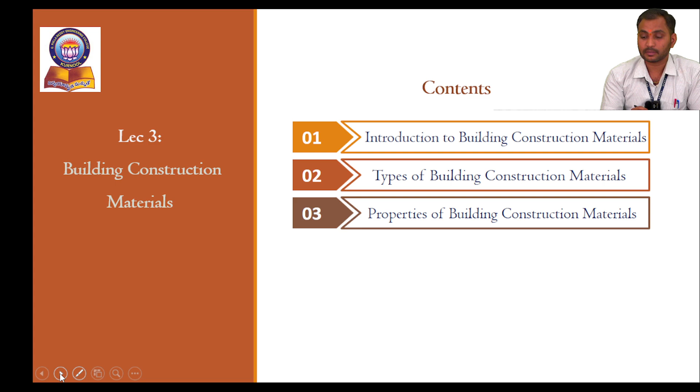Building Construction Materials. We'll discuss the topics in this session under lecture 3, Building Construction Materials. The contents are: first, introduction to building construction materials; second, types of building construction materials; third, properties of building construction materials.

Now let me explain the introduction of a building material. First, what is meant by a building material? In previous lecture 2, we discussed building planning and building construction. For example, if we want to construct any building, whether residential, commercial, institutional, theaters or industrial, any type of building, we already know the requirements of planning conditions. Now we need to know how it has to be built, what materials we have to use. So in this session we will discuss the material.

Building construction material, in civil engineering, any type of material, will be very useful for different purposes. There are some common materials: stone, we can construct stone masonry; bricks, we can construct walls, brick masonry; concrete, for structural framed structures - slabs, beams, columns, footings, all RCC type structures we can construct with concrete.

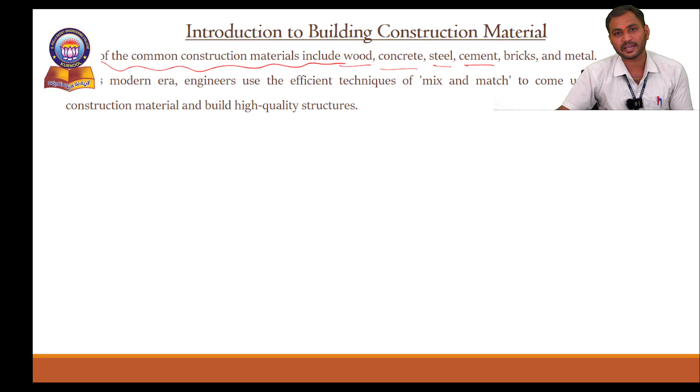What is the purpose of cement? If we are giving bond between two papers, we use an adhesive material, either gum, fevicol, or fevistick - for wood we can use fevicol. Like that, for our building construction, for bonding strength in our structure, cement is used.

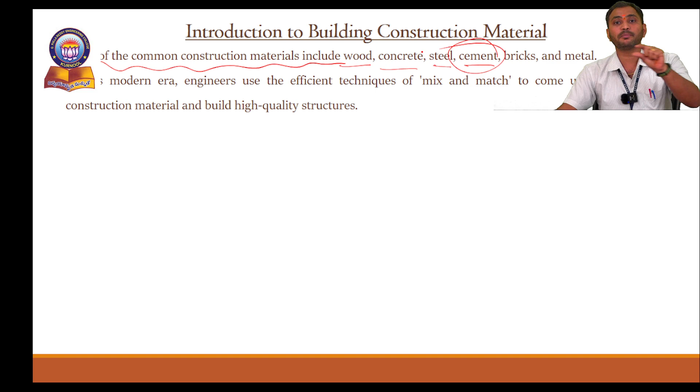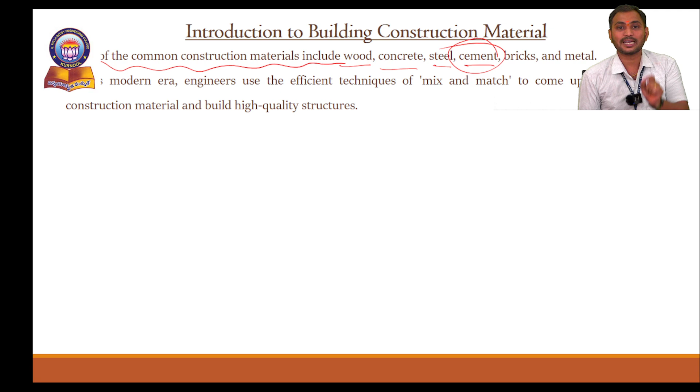So cement mortar is placed between two bricks. These two bricks cannot be attached without it, so between these two bricks we provide cement mortar. Not only does it give bond between the two bricks, but it is also used to prepare concrete material.

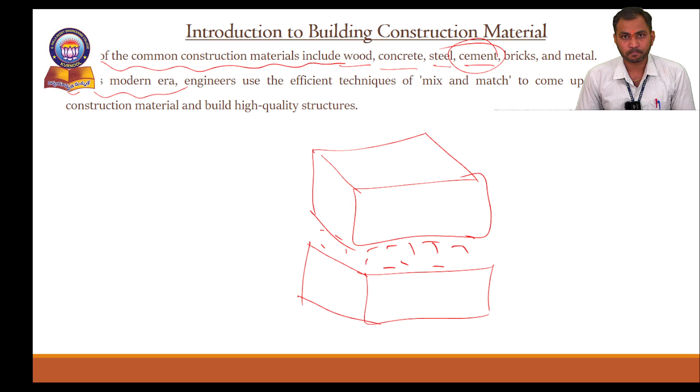In this modern era, most civil engineers are thinking of different types of building materials. In the olden days, most structures were built using stone masonry - some irrigation structures and forts are examples. There are some basic materials like that. But in this modern era, and in upcoming future, many researchers and scientists among our civil engineers are inventing different types of materials.

Cement is prepared in industries or factories. We will see how many types of cement there are in our upcoming slides.

Next, bricks - red color bricks, cement bricks, lightweight bricks. There are some different precasted bricks also. So there are efficient techniques to mix and match to come up with the best construction material. Lightweight materials also we are using for the construction of a structure.

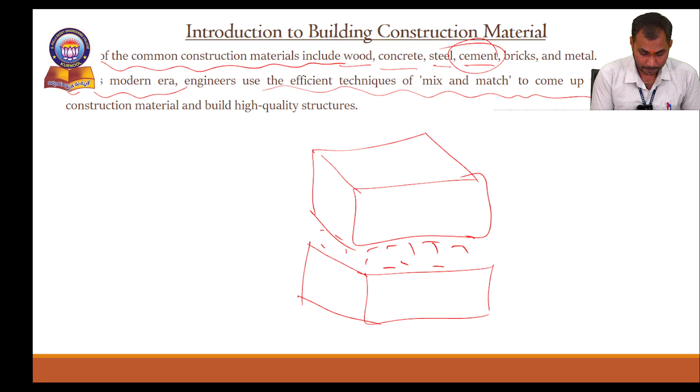Let me tell you a small important point to keep in mind. Whenever we are going to construct any type of structure, we will select a material. We should not directly use it for the structure purpose - we have to check the quality.

A small example - you people are studying in the BTech field, engineering field. Up to 4 years you will study in your college. After the 4 years, some people will go for higher studies, some will choose government sector jobs, or some will go for private jobs.

When going to private jobs, software jobs, some companies come to the college premises for placements. Do they directly hire them? No, they will interview the students. In that interview, what are they trying to find? Nothing but the quality of that person - whether the person can do our company's work or not, whether he is fit for our company or not. That's how they do the interview.

Same way, for any type of material we are going to use for construction purposes, we have to do the quality test. Without good quality, we should not introduce it for our building construction purpose.

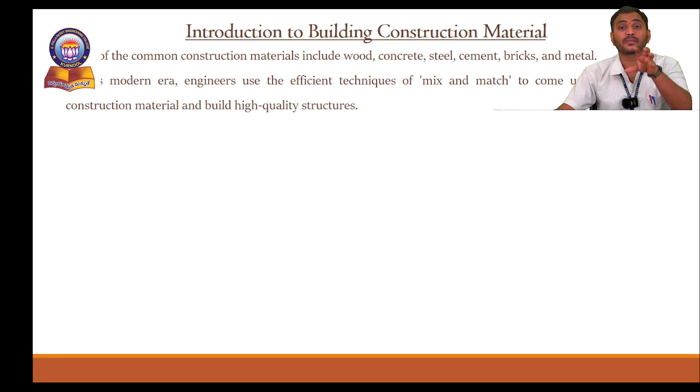There are some types of building materials. One is bricks, next is cement, third is concrete, fourth is sand, fifth is steel or reinforcements, which we use to construct slabs, beams, columns, footings, staircases, or any type of structural elements - we use these steels.

Next, glass - we provide it at window frames. Next, plastics - what is the need of plastics or fibers? For plumbing purposes we can't use steel, so for that purpose we use plastics. Next, woodens - to have doors or to frame windows.

Next, tiles - what is the purpose of tiles? For flooring purposes, or for walls in bathrooms or any urinal places, tiles.

When we are going to select any type of building material, we have to check whether it is good quality or not. Next, we have to check whether it is cost effective or not - low economy or high economy. Third, under which class it is coming - classification, whether it is grade 1, grade 2, or grade 3. If it is grade 1, it means it is very good quality in size, dimensions, everything is right.

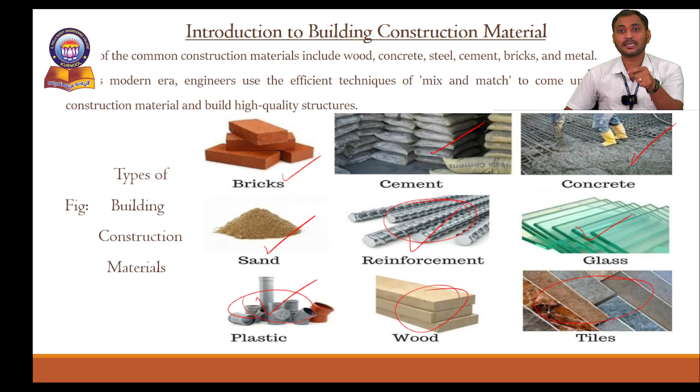In grade 2, somewhat medium quality, okay, for small works we can construct. If grade 3 very poor quality, we can tell no. So all these objectives we have to see: one is quality test, next cost and economy conditions, and third is the grades we have to check for every type of construction material. Why? Because by using these construction materials only, we are constructing the building structure, so our building structure should be strong, safe, and durable by taking the support of these materials.

Now, what are the properties of the building construction material? Nothing but how we are getting that property. For example, what is the strength about you? If any load is applied on you, we will get your strength. For example, we are applying 5 kgs, whether you will bear that 5 kgs or not. Yes, you will bear it. Next, extra 5 kgs will be added, how much, entire 10 kgs. So will you bear that 10 kgs or not? Yes, you are bearing that, 10 kgs of load you are bearing.

Again, I am adding extra 5, so total how much, 15 kgs of load. Are you bearing or not? Some small deformation, okay, somewhat little bit you are bearing that load. Again extra 5, now entirely how much, 20. By applying 20 kgs of load, suddenly what will be happening? Suddenly you will get deformation. Nothing but what is your strength, how much load is applying on you, 15 kgs, how much strength? Nothing but stress means load by area we will calculate now. So like that you are bearing some 15 kgs, up to 15 kgs of weight, like that we can tell.

So like that, how the properties, there are 3 general basic properties: one is physical property, second one is the chemical property, and third one is the mechanical property.

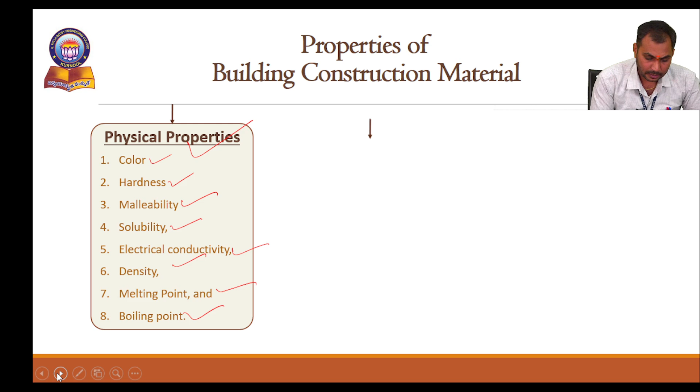When coming to the second one, chemical property. Chemical property means nothing but is there any chemicals present. For example, wood: if you are going to apply any acid or phenol or any chemical agents, how will the wood react? If it is going to be damaged, means the entire structure will be damaged, no?

For example, concrete, we are preparing the concrete by using natural resources. So in those natural resources, if any chemical agents were added, is there any problem or not, we have to check. Nothing but toxicity, reactivity, coordination numbers, oxidation states, flammability, heat of combustion, or else in water also we have to check the chemical properties. Nothing but alkalinity, acidity, how much sodium, how much salt contaminant is there, how much sulfates are there. Next, fluoride test also we will do for water. Water is also one of the materials we use to prepare the concrete, no.

So in that concrete, will the water also mix? Is there any chemical agent present in that water? If it is there, how will it react with that concrete? If it is reacted, and we use it for construction purpose, at how many days, what will be the durability of a building become?

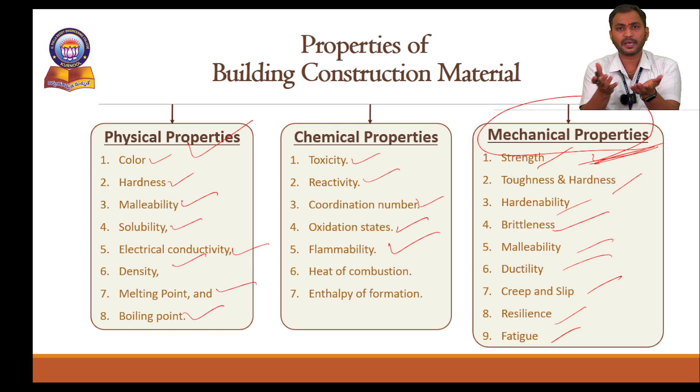Strength, just to know, we have discussed. Okay, if on you I'm going to apply 5 kgs of load, will you bear it or not? Right, so if you bear 5 kgs of load, that means strength is there. Like that, continuously up to 15 kgs you are bearing.

Extra 5, so 20 was applied. Now at the 20 stage, suddenly it is demolished. That means you will bear the load up to only 15 kgs.

Okay, like that - toughness, hardenability, impact tests. These are the basic mechanical properties obtained by application of a load.

Okay, just by appearance - next, any chemical agents we will check. Okay, so these are the properties.

Now in the next slide we will discuss - there are a few basic materials that will be used. So we will discuss how many types of those materials there are, what tests we are going to perform, and what properties we are going to use.

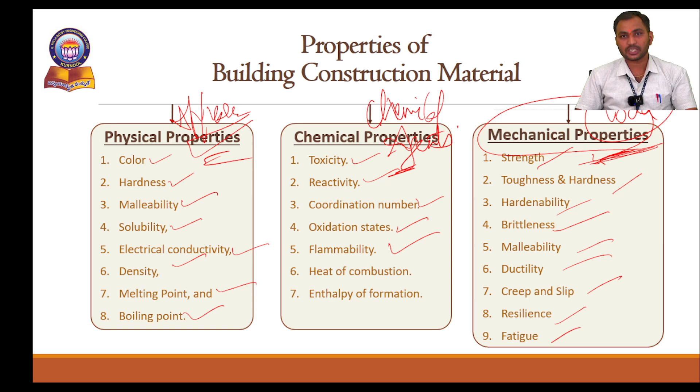Okay, first one, cement. What is cement? Who invented cement? Joseph Aspdin. Okay, Joseph Aspdin. So in the previous olden days, how was cement invented in our India?

Okay, nothing but by using lime powder and jaggery. Jaggery syrup, we can call it sugarcane juice syrup. By using that jaggery syrup and lime powder mixed together, a small natural cement would come.

But Joseph Aspdin, he introduced the first cement. Okay, he introduced the first cement using extra chemical agents.

So what is meant by cement - cement is one of the materials which is used for construction purposes to provide the binding property.

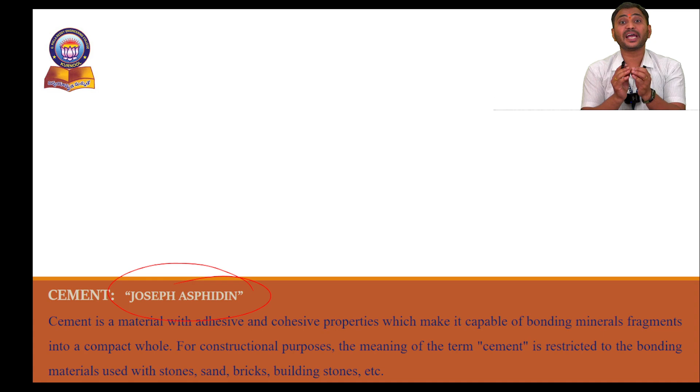Okay, the binding property. For example, if there are 2 papers, to get them to stick together, what we are going to be providing is the adhesive property - nothing but gum, or Fevicol, or any plaster - nothing but gum.

Fevicol is one adhesive property. But will that adhesive property, that Fevicol, be used for our concrete purpose? No, to have very good bonding for our structural member,

cement is the material. Okay, cement is nothing but a material to generate or improve the binding property for concrete members. What are those concrete members?

Slab, beam, column, footings, whatever it may be. Not only that, for framed structures and also for load bearing structures, cement will be used.

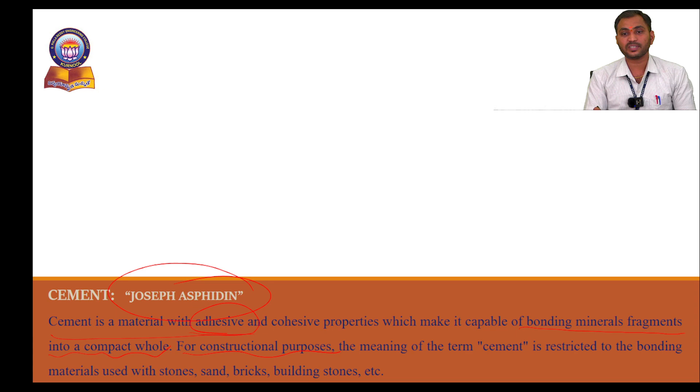Okay, so bonding mineral fragments into a compact whole. For constructional purposes, the meaning of the term cement is restricted to the bonding material used for stones, sand, bricks, building stones, etc.

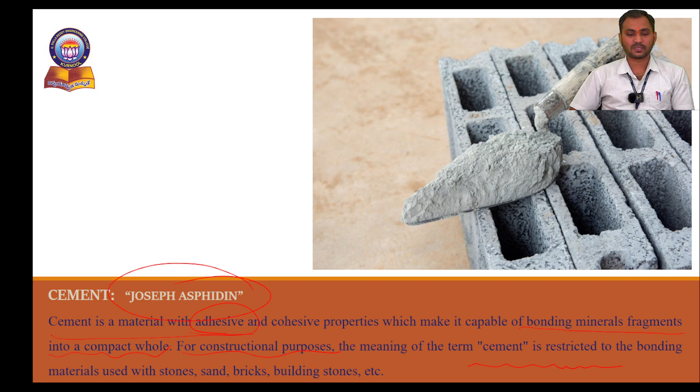Now we will see how many types of cements there are. Nearly there are 10 or 8 types of cements. In our general building constructions, only 2 types of cements will be used: ordinary Portland cement and Portland pozzolanic cement.

Next, rapid hardening cement. Next, extra rapid hardening cement. Next, low heat cement, sulfate resisting cement, quick setting cement, and blast furnace slag cement. These are the main different types of cements.

Again, if we are going to purchase any cement bag, you just observe how many companies of cements are there. These are just the types: ordinary Portland cement, Portland pozzolana cement.

So if we go for the other companies, how many companies will be there? Mahashakti cement, Panyam cement, Ultratech cement, Nagarjuna cement, and some different companies of cements over there.

If you are going to purchase any one company's cement, you just observe whether it is OPC or not, or else PPC or not. OPC means ordinary Portland cement. PPC means Portland pozzolana cement.

Again, if you are going to be purchasing OPC, nothing but ordinary Portland cement, it is going to be divided into 3 grades: grade 1, grade 2, grade 3. Grade 1 is nothing but grade 33, grade 2 is nothing but grade 43, grade 3 is nothing but grade 53. What are the uses of these 3 grades?

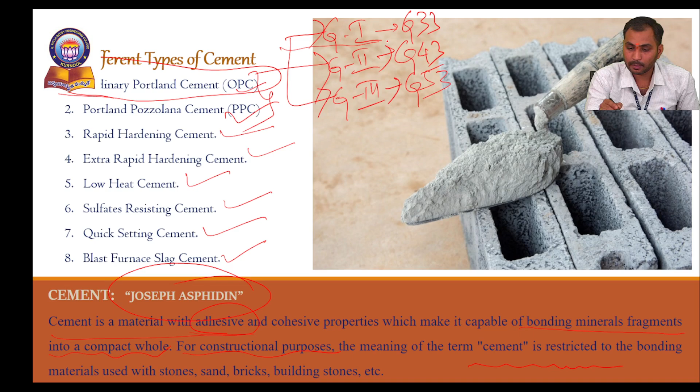If you are going to be using for any small temporary type of construction, then you can purchase grade 33. It is having very less somewhat strength in that cement.

If you are going to be purchasing for residential buildings, then you can purchase grade 43. If you want to construct a very small room or a small building that's only for 1 floor, and in future you can't extend it, then you can purchase grade 33. Or else if you want to extend in future times, then you can go for grade 43 — nothing but construction of any apartments, residential buildings, or duplex houses.

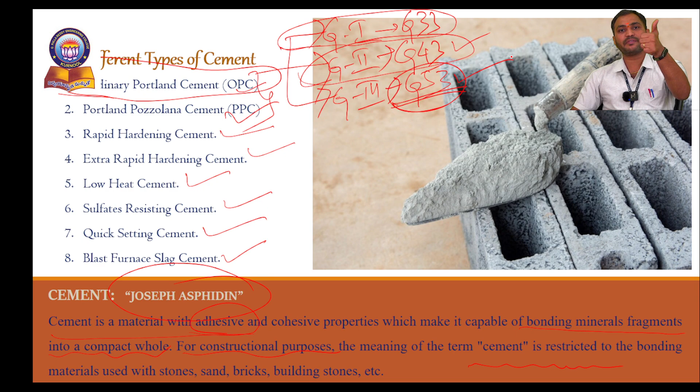When coming to grade 53, it is a very high standard grade. If you are going to be constructing very high standard high-rise structures, nothing but some large statues like the Ambedkar statue, Statue of Unity, Statue of Equality, and other different statues — or not only these statues, but also if you are going to be constructing large flyovers and large bridges, then you have to select grade 53. It is a very high standard, and the strength it will be having is somewhat more.

So by observing these 3 grade conditions, you have to purchase either ordinary Portland cement or Portland pozzolana cement, whichever is normal. Between these two, you can decide which one to purchase. And for the other types of cements, in different temperature conditions, to improve or reduce the workability of concrete, you can select that cement material.

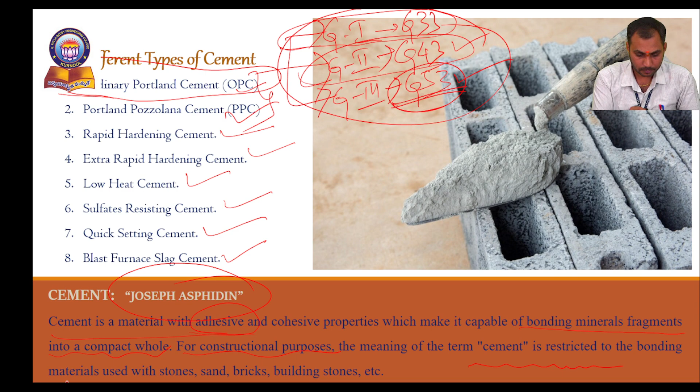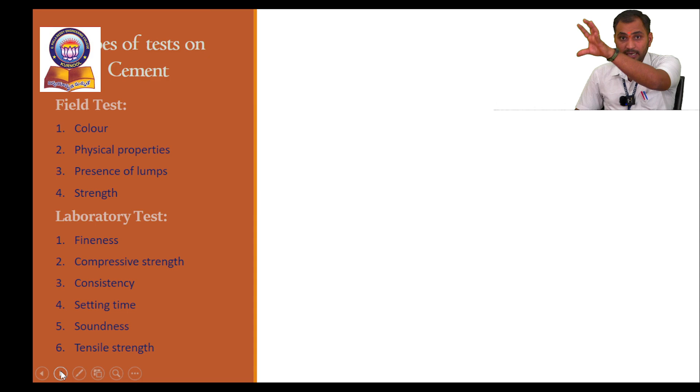What are the types of tests we'll conduct on cement? One is the field test, second is the laboratory test. Cement is also one of the materials — in the factory, one cement material is introduced. Suddenly that cement material you purchase, and suddenly you won't apply it for construction.

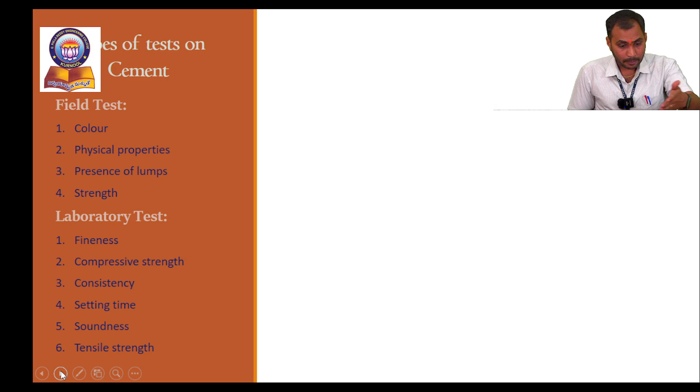As I told in the starting slide, whatever material you are going to use for the building structure, you have to check the quality. How are you going to check the quality? Nothing but by attending the test, by conducting a number of tests. If you purchased that cement bag, once it comes to the field, what are the field tests you are going to check? Nothing but the color test, and second, physical properties.

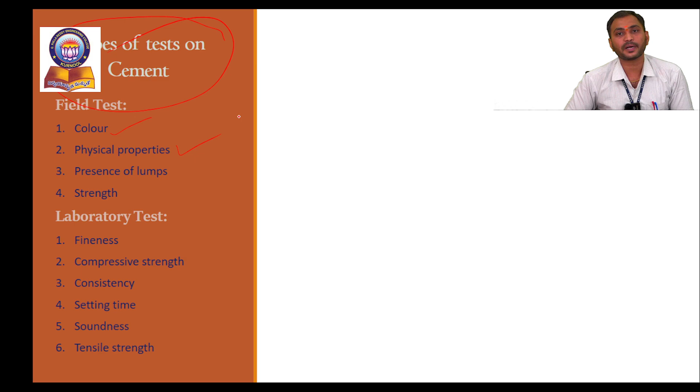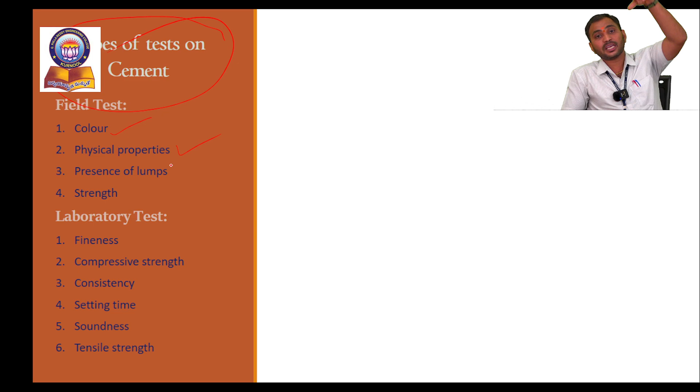If you are keeping your hand in that cement bag, your hand should feel very cool temperature. Next, again, if you keep your hand inside that cement, it should not get more lumps — lumps means gaddalu. So like that, and also there is the strength test, which we will see.

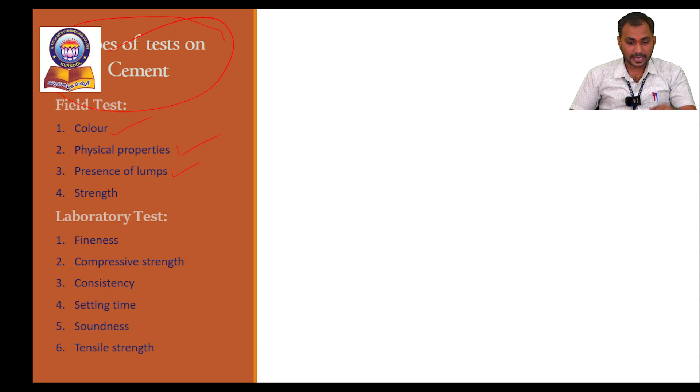This is the cement bag. In this cement bag, you just fill your hand inside, keep your hand inside, and present it like this. So your hand should feel very cool and pleasant. If it feels very cool and pleasant, then the quality of the cement is also very good.

Next, absorption, water absorption of cement. Next, size of the cement we have to check. Nothing but a 90 micron sieve, we have to do the size test of the cement. So these are the basic field tests we will conduct.

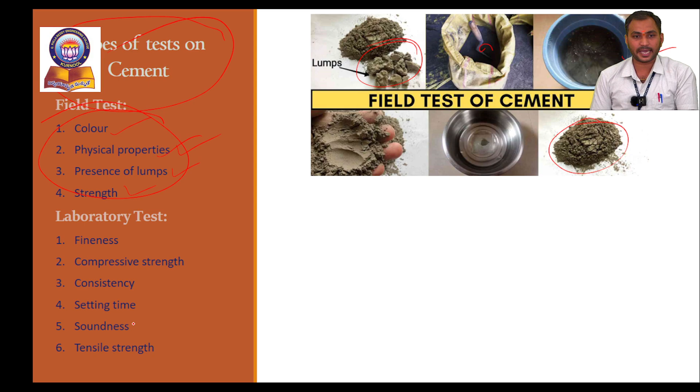In laboratory tests, what are the types of tests that will be conducted for cement? One is fineness, compressive strength test. Next, consistency - how much water quantity will be taken for this cement. Next, setting time - at how much time the cement will set hard. Next, soundness test - in different temperature conditions, at how much expansion it will get. Next, tensile strength tests.

So these are the basic equipments that will be used for laboratory tests.

Initial and final setting equipment. Next, fineness, nothing but 90 microns sieve. We take some quantity of cement and sieve it, then calculate how much is retained and how much is passing.

Next, soundness test. There is a small mold, and to that small mold, 2 strings will be attached. On those 2 strings, it should expand after 24 hours of preparing the cement mold.

Next, this is the tensile strength test or compressive strength test. So these are the tests we conduct in the field, and these are the tests we conduct in the laboratory, checking these conditions as per Indian Standards Bureau specifications.

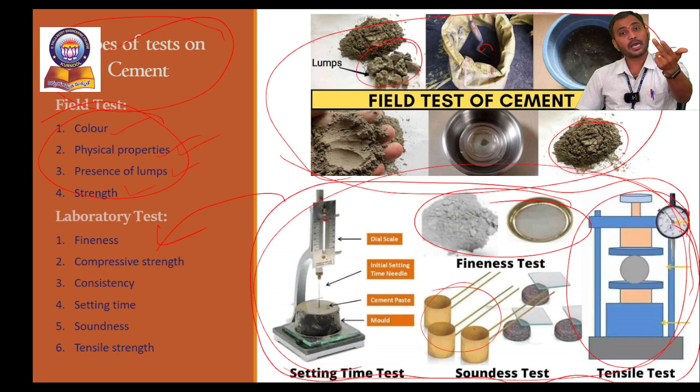So right, this cement is having very good quality. We can use it for any type of construction purpose. So this is the basic information about cement.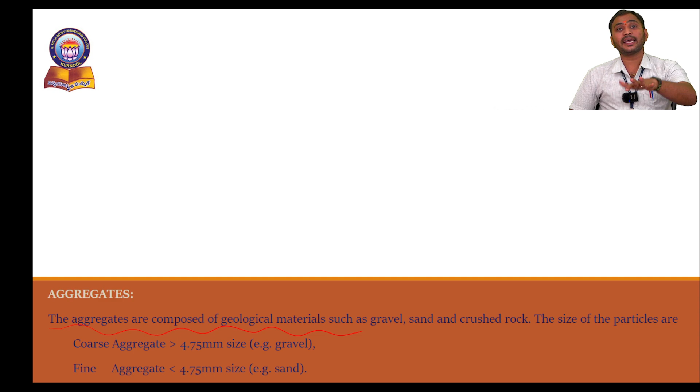The aggregates are composed of geological materials. They are entirely available as natural sources, such as gravel, sand, or crushed rock. Very large parts of rocks or stone particles we crush, so if we crush those rocks, they will have small stone particles. Those small stone particles are what we call aggregates.

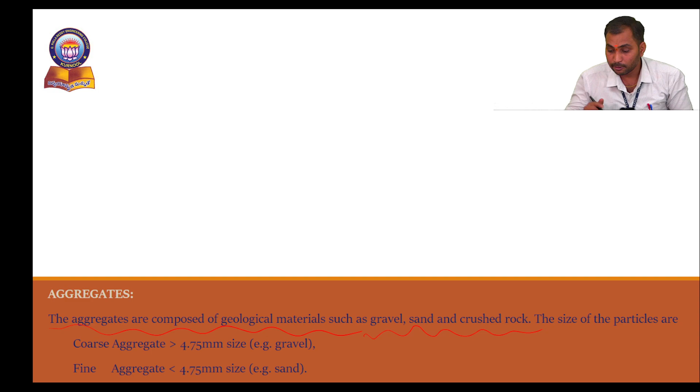These aggregates are divided into two types depending on the size. One is coarse aggregate, which has a size of more than 4.75mm - for example gravel, boulder, or cobbles. Fine aggregate is less than 4.75mm, which is nothing but sand.

Sand - where is the availability of sand? What is the source? Sand is available in rivers and also in oceans or seas. But for construction purposes, we should not consider sea sand, because sea sand contains salt contaminants. If salt contaminant material is present, we should not use it for building construction purposes.

If we use it, the building is going to be damaged slowly. Inside that, the steel reinforcement will develop corrosion, and indirect attack will be applied on our building construction elements.

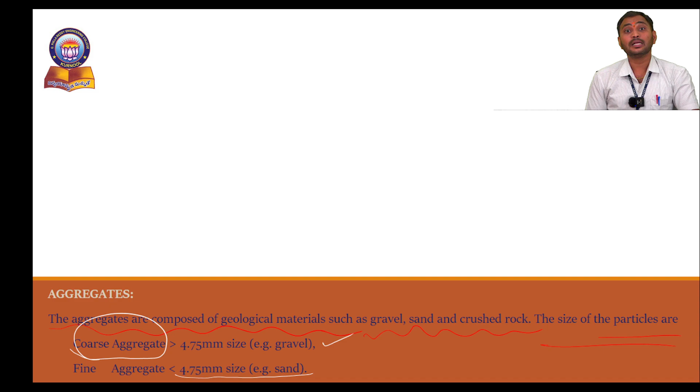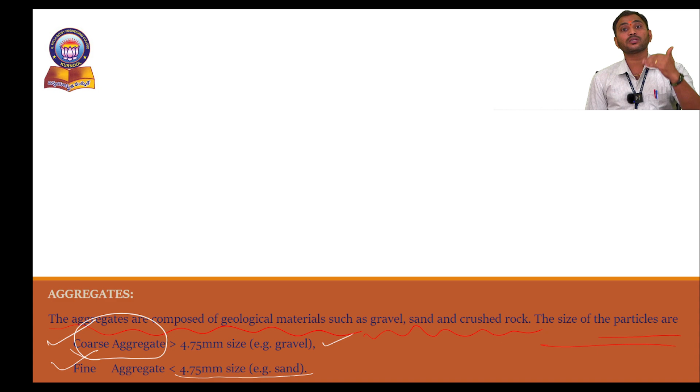So how many types of aggregates are there? Two types - one is coarse aggregates, another is fine aggregates. What is the size of coarse aggregate? More than 4.75mm. What is the size of fine aggregate? Nothing but less than 4.75mm.

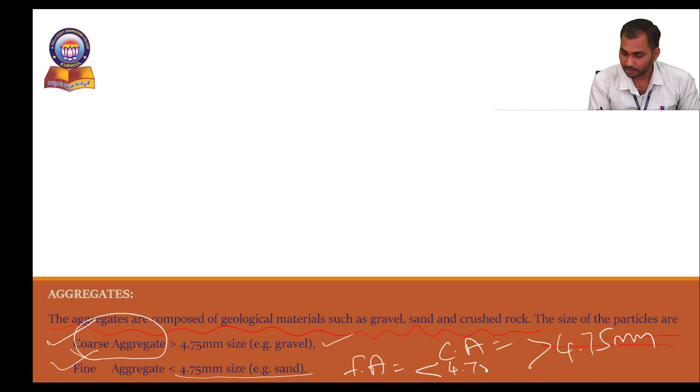Now if we want to see the images, we will see them now.

The above figure shows coarse aggregates, which are particles more than 4.75 mm. You can observe angular particle type aggregates here, and rounded particles as well. Gravel is there, pebbles are there too. Sizes like 40 mm, 20 mm, 10 mm, and 12 mm are all available.

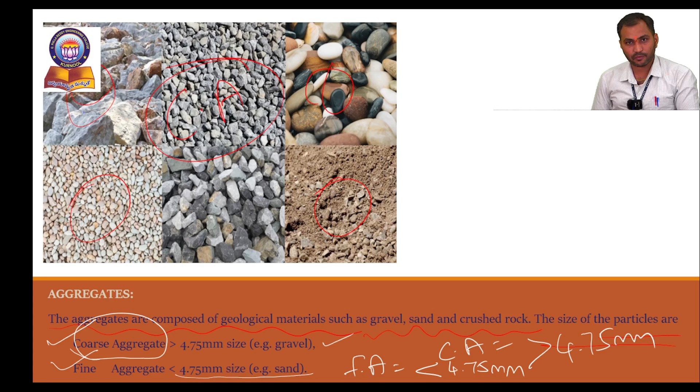If the size is less than 4.75 mm, that is fine aggregate. What is an example of fine aggregate? Sand. Where is sand available? Sand is available in river areas, and for building construction purposes, river sand is very good quality since there is no salt contaminant in it.

Again, sand is divided into three categories: coarse sand, medium sand, and fine sand.

Coarse sand is used when constructing any foundation part, or for constructing roads. Medium sand, or coarse sand, will be used for construction members.

When coming to fine sand, it has to be used for plastering purposes, since it is very smooth and very loose. Observe our walls, how smooth they get before applying wall putty. So before the wall putty, to get that smoothness, we use fine sand.

For example, for plastering purposes, can we use coarse sand also? Yes, you can use it, but the surface roughness will be more.

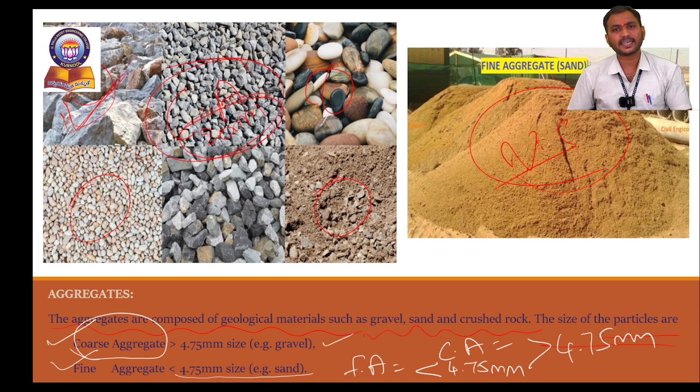Again in sand, this is natural sand. So sand is available from two sources: natural and artificial. Where will artificial sand be available? Near factory areas. It's nothing but, if you take any stone and keep it in a mixie grinder machine and switch it on, how will it be formed? Like powder form.

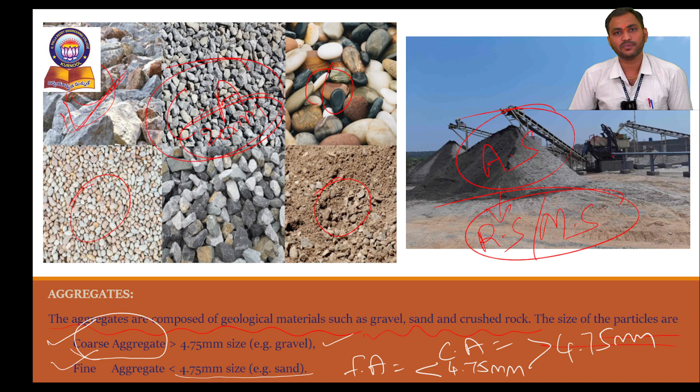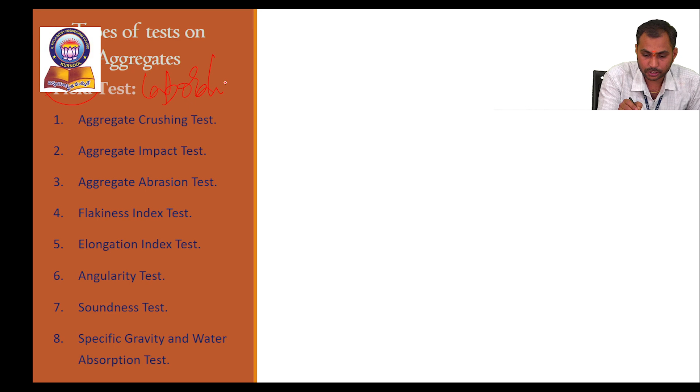What are the types of tests we use to find out about aggregates? These are not field tests, sorry, that was a small typing mistake. It is actually laboratory tests, my dear students, please correct this.

What are the laboratory tests? Nothing but aggregate crushing test, to check what strength the aggregate has when crushed. Aggregate impact test means if we suddenly apply load on the aggregate, how will it behave? Take a small stone particle on the ground surface, take a hammer, and suddenly apply the load. What will happen? It will break or become powder. So how much strength is present in that aggregate?

Next, aggregate abrasion test, then flakiness and elongation test. From the flakiness and elongation test, we can find the dimension: the thickness of the aggregate and the size of the aggregate. Next, angularity test, then soundness test, and specific gravity and water absorption test.

Okay, so specific gravity and absorption of test.

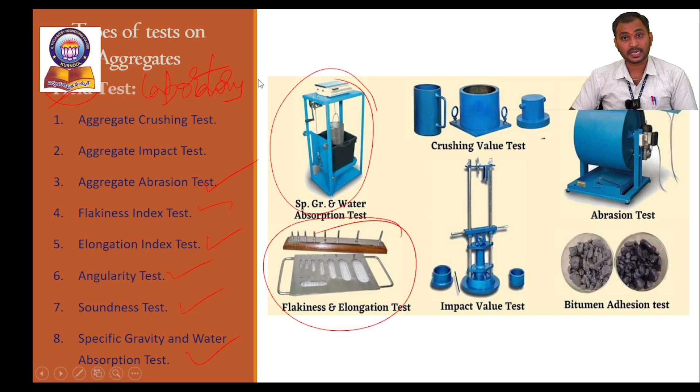Next, crushing value test means these are the equipments we will use for aggregate to find the crushing strength test. If we are going to apply the compression load, how will it happen? Slowly it will be crushed. So how much load is it bearing?

From that load, how much strength it is getting, from that we are conducting the aggregate crushing strength test. Next, impact value test. Next, bitumen adhesion test also we can tell. Next, abrasion test. So these are the basic types of laboratory tests we will conduct for the aggregates. Okay, right.

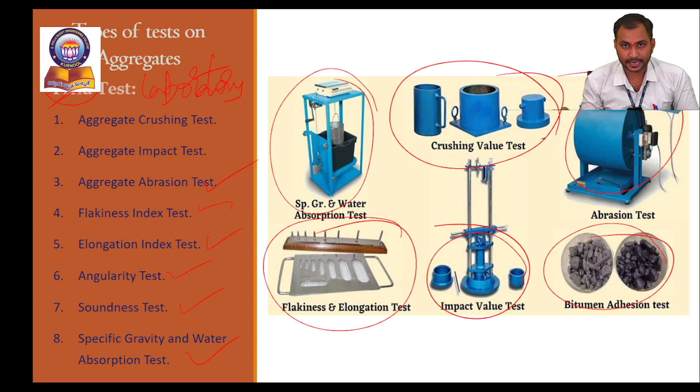Next one, last but one, is the bricks. What is meant by a brick? Brick is nothing but one of the construction materials which is used to partition the room.

Partition the room. For example, this is a very big hall, and I want to give it for rented purpose. So now I want to do the partition, so brick is a very good option. But it should be permanent. No? For example, if I want to partition my room just for temporary purpose.

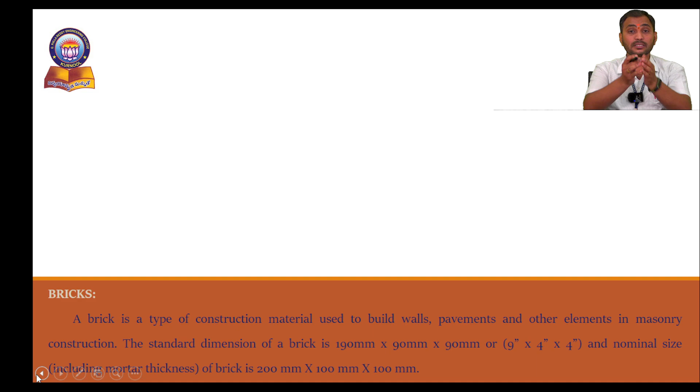Then go for the POP boards, or else go for any aluminium boards like that. If you are going to partition the room in a permanent manner, go for bricks. Why? Because that amount of load is going to act on those bricks also, it should be resisted. Okay, brick is a type of construction material which is used to build walls, used for pavements for roadway purpose sites, and for other masonry elements.

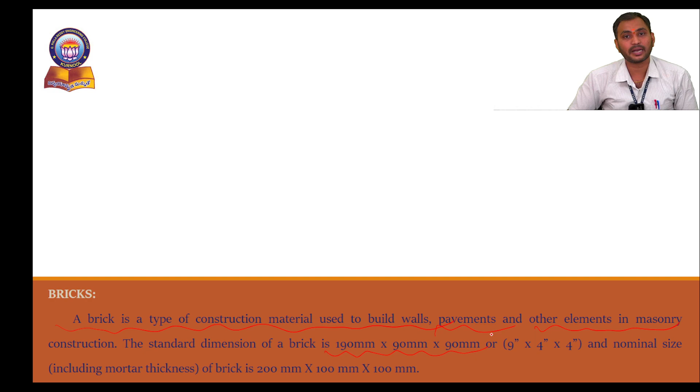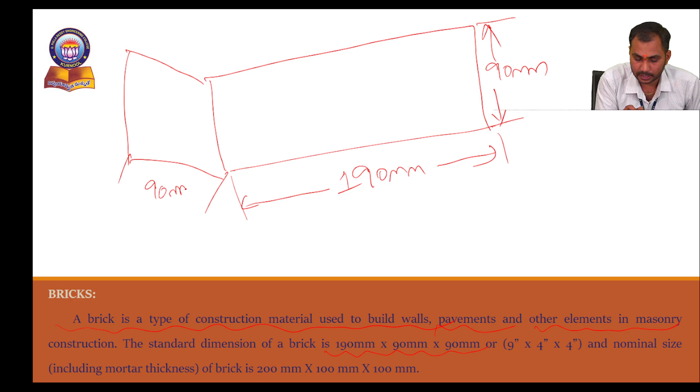Now, what is the standard dimension of a brick? Nothing but 190 mm by 90 mm by 90 mm. For example, this is 90 mm, this is 190 mm where length of a brick is 190 mm. Next, this is the height, 90 mm. Next, width is nothing but 90 mm. Okay, this is the standard dimension.

So if we convert into centimeters, it's nothing but 19 cm by 9 cm by 9 cm. This is the standard brick size as per our Bureau of Indian Standards. Some bricks have different standard dimensions, presented either in mm or in centimeters.

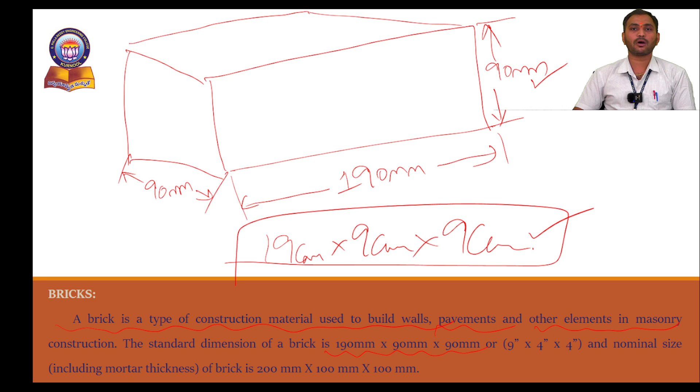For example, if you are studying in our classes, we study in meters, mm, or centimeters. If you go to a field, all the masons or laborers have very good knowledge in inches or feet. So when coming to inches, it's nothing but 9 inch by 4 inch by 4 inch. This is the standard dimension of a brick in inches.

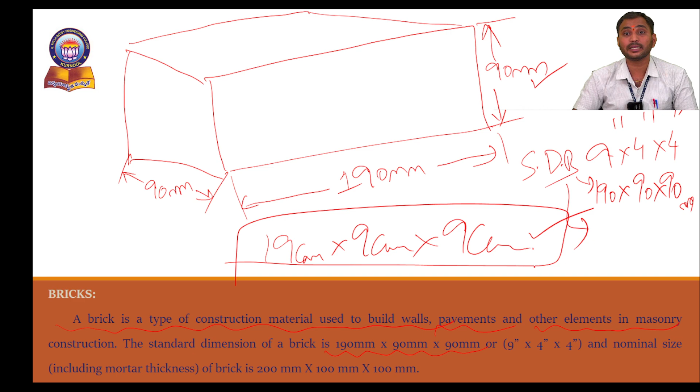Standard dimension of a brick in mm means 190 mm by 90 mm by 90 mm. In terms of centimeters, it's 19 by 9 by 9 centimeters. Okay, right.

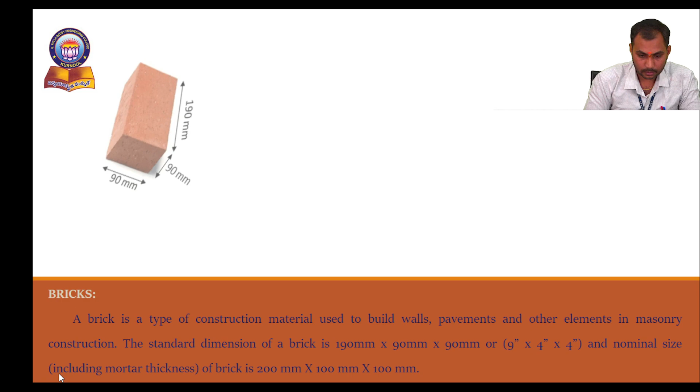You people can observe here, this is the standard dimension of a brick. Bricks also have different types. Next, what is the orientation? Stretcher, header, next soldier, sailor, rowlock, and shiner. Let's observe the different facings here.

Stretcher, nothing but the length should be presented like this. Next, header, nothing but the width part. Width and, see here, you can observe length and height of a brick - if it presents that way, that is stretcher. Next, the header means width and height will be the same, that is the header part.

When coming to soldier, nothing but width and length. So don't be confused, my dear students. First we present the x-axis, then we go for the y-axis. So length into height here, width into height here. When coming here, breadth into length - that is the soldier part.

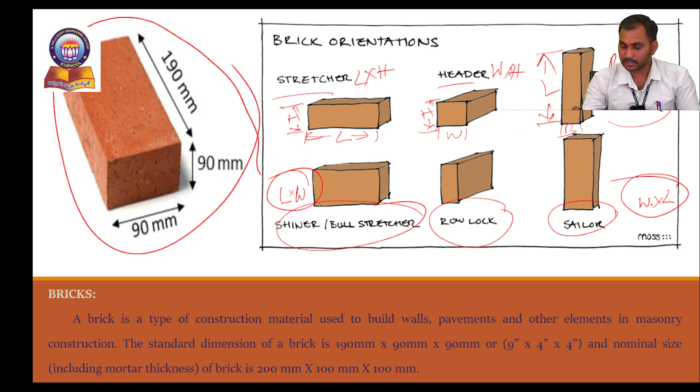Next, shiner. Shiner is nothing but just length and width part. When coming to rowlock, nothing but the same dimensions. Next, sailor, nothing but width and length. Okay, width and length. So these are the different brick orientations.

Now we'll see what are the properties of a good brick. Color test: it should be well uniform and bright. Next, shape test: it should have the correct size, 19 centimeters by 9 centimeters by 9 centimeters, perfect shape.

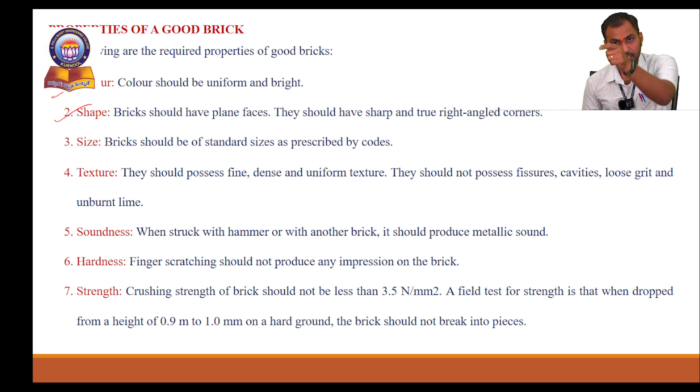Next, size of the brick also it should be right. When we talk about shape, the edges should be sharp and perfect.

Next, soundness: if we beat it with a hammer, we have to get that metallic sound. If we take the brick in our hand and beat it with the hammer, it should get a metallic sound.

Next, hardness test: we have to scratch the brick with our finger. It should not get scratched.

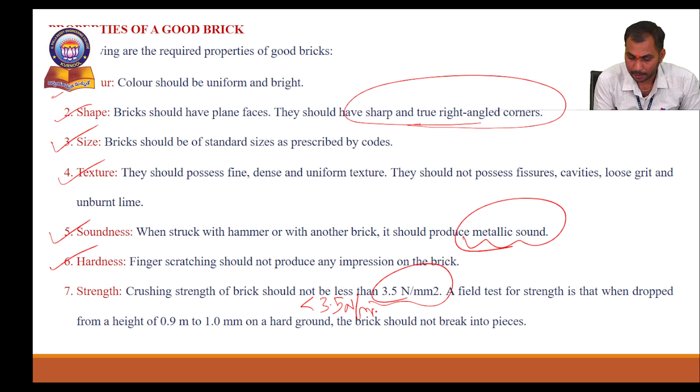Next, strength test: by applying any compression strength, it should not break. The strength should not be less than 3.5 Newton per mm square. The standard dimension of a brick, and the strength test should not be less than 3.5 Newton per mm square. That is the strength test.

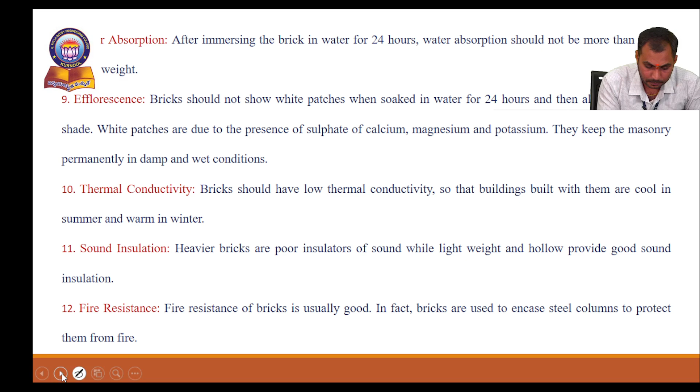Next, water absorption: up to 24 hours we will keep it in water. How much quantity of water it will absorb, so in that 24 hours we will calculate.

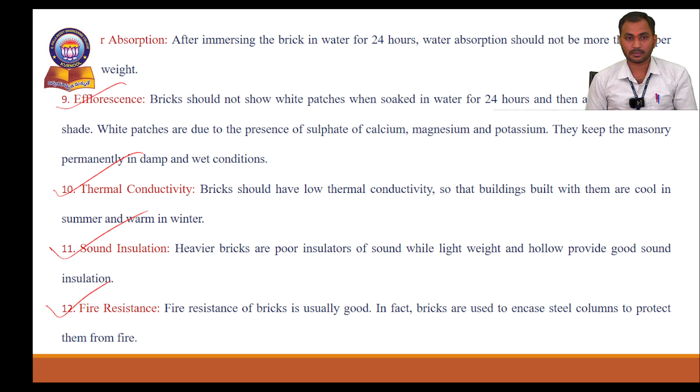Next, efflorescence. Next, thermal conductivity, sound insulation, and fire resistance. These are the basic properties we will test and conduct on bricks.

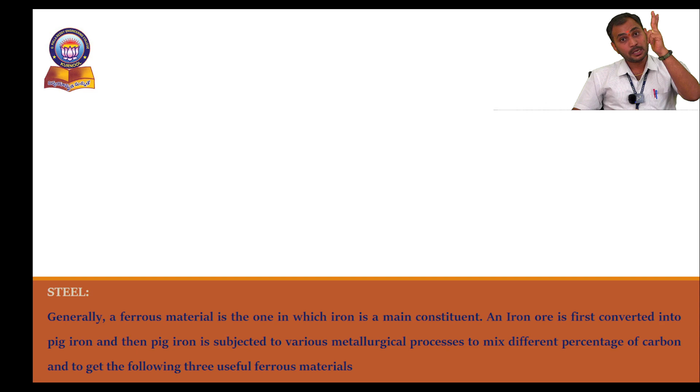And the last topic is steel. In today's session, we have discussed the introduction of construction materials, the types of construction materials, the properties of construction materials with each construction material, and finally we came into building construction materials.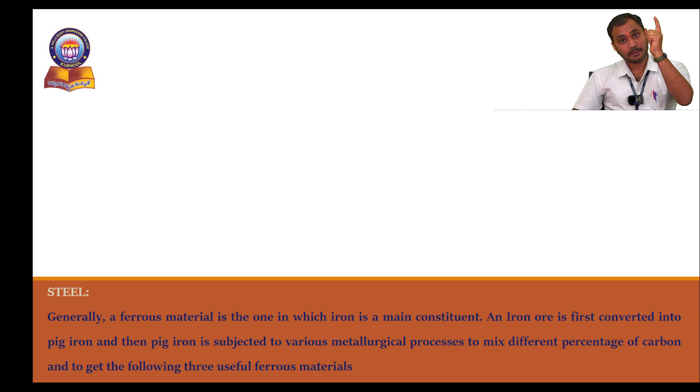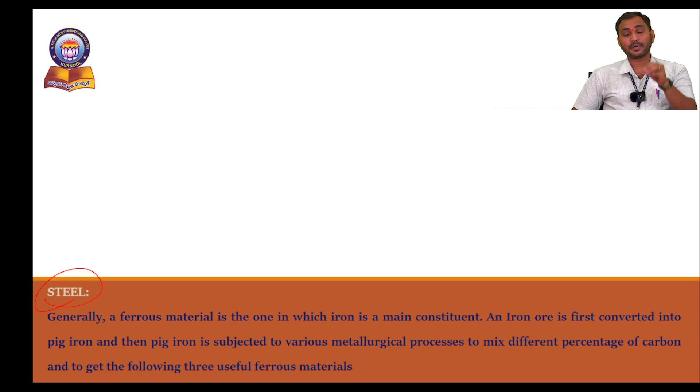In that, cement, aggregates, brick and steel. So steel is nothing but, what is the purpose of steel? Generally steel is used for presenting in the plain cement concrete, to resist the load.

Generally, ferrous material is one in which iron is the main constituent, and iron ore is first converted into pig iron. Then pig iron is subjected to various metallurgical processes to mix different percentages of carbon and get the following three useful ferrous materials.

In civil engineering structures also, steel is one of the more important materials. If we are going to construct our building with only plain cement concrete, some load will be having. If the load is applied, deformations will slowly become very large. So to resist those deformations, we provide steel reinforcements into the structural elements.

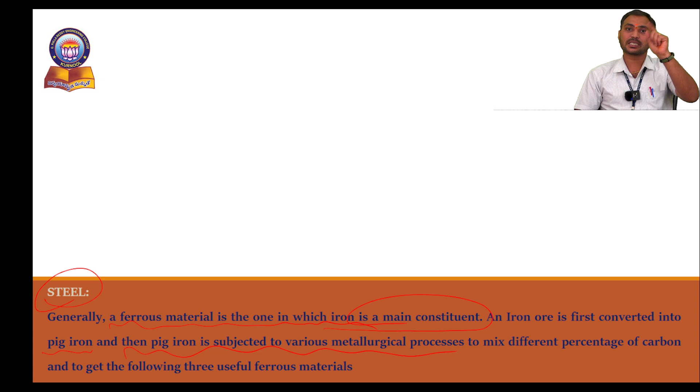Then small tensile stresses will be developed in that steel. So the steel will provide more support for our concrete elements or other structural elements. So what are the types of steel that were there?

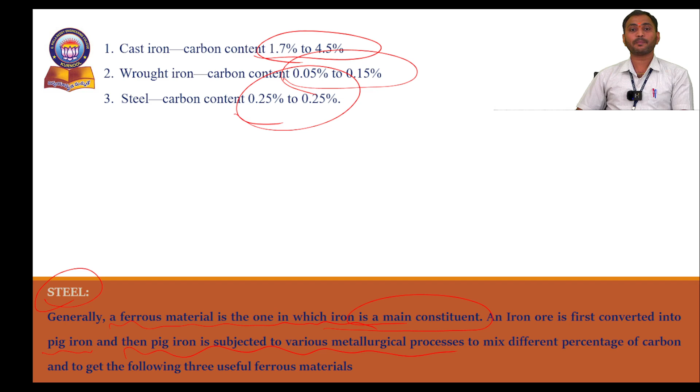Cast iron, wrought iron, steel. Cast iron has carbon content of 1.7% to 4.5%. Wrought iron has carbon content of 0.05% to 0.15%. Coming to steel, the carbon content is available at 0.25%, or somewhat in that range.

So this is the class, my dear students. We have discussed lecture number 3, building construction material, and one more building construction material is there, concrete. We will discuss in the next lecture, video 4, in detailed manner what is the importance of concrete for the structural member, for structural purposes, and how the manufacturing process of concrete will be there. We will discuss entirely one lecture for concrete material.